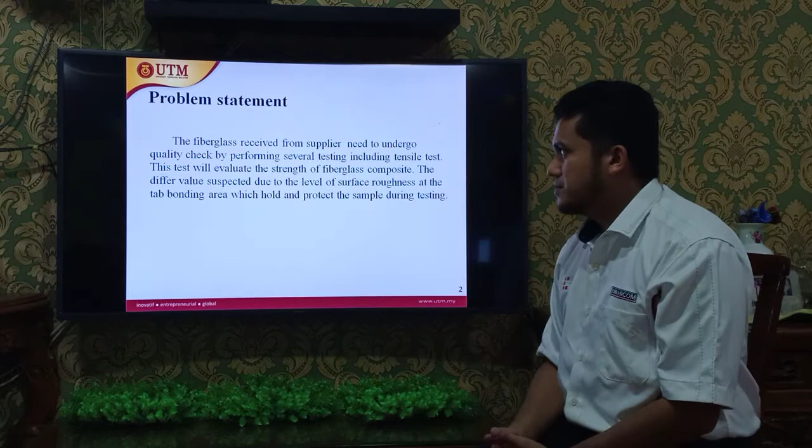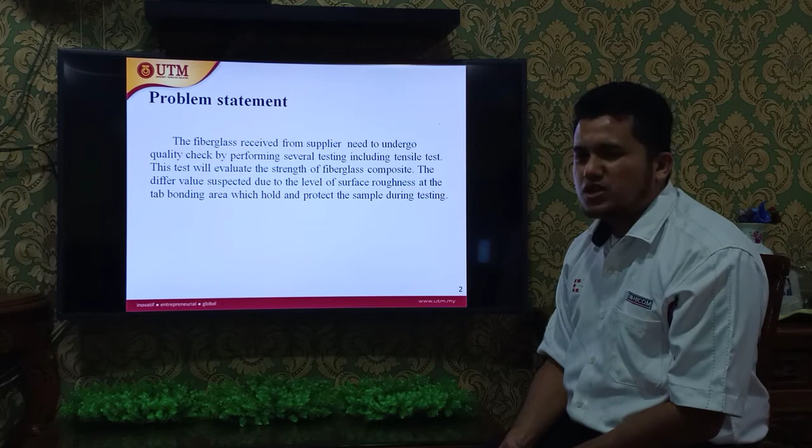The fiberglass received from the supplier needs to undergo quality check by performing several tests, including a tensile test. This test will evaluate the strength of the fiberglass composite. The differing values are suspected to be due to the level of surface roughness at the tab bonding area, which holds and protects the sample during testing.

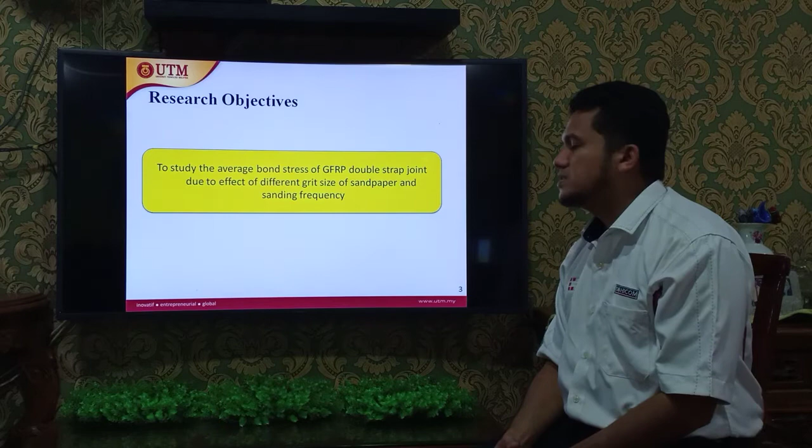This is my research objective: to study the average bond stress of GFRP double strap joint due to the effect of different sizes of sandpaper and sanding frequency. For scope of research, this project is to investigate the main contribution to the bonding strength of the tensile tab area, like surface roughness and adhesive material used.

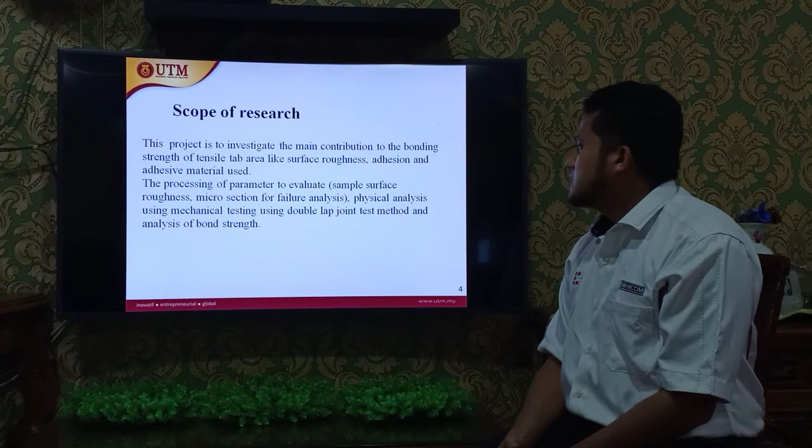The parameters to evaluate include sample surface roughness, microsection for failure analysis, physical analysis using mechanical testing with the double lap joint test method, and analysis of bond strength.

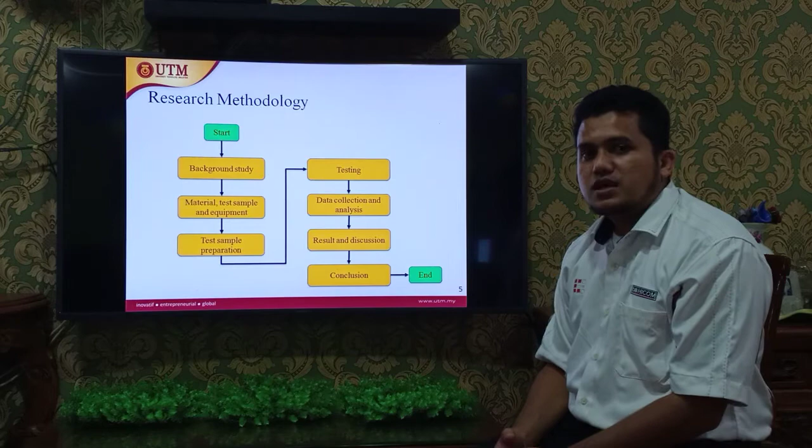This is the research methodology. I will start with the background study. Next, material test, sample and equipment, followed by the test sample preparation. Testing process. From the testing, we get the data. We do data collection and analysis to obtain the results, discussion and conclusions. And lastly, I will conclude at the last slide of my presentation.

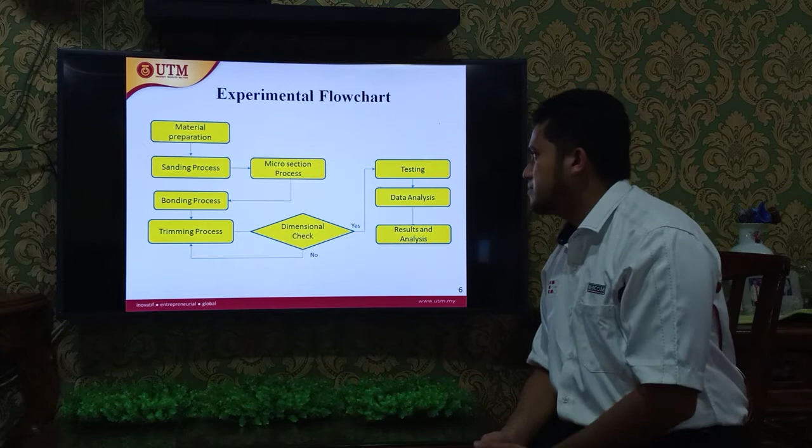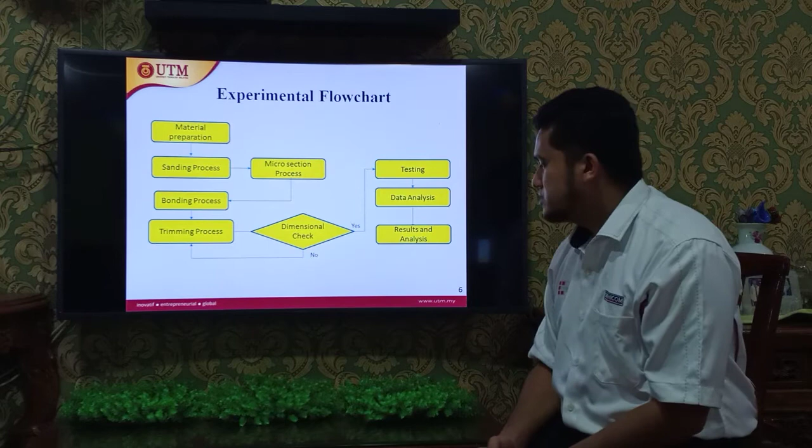This is the experimental flowchart. First, material preparation. Second, sanding process activity, microsection process, bonding process, trimming process. For the dimensional check, if yes, the dimension follows the requirement, we proceed to testing. If no, we revert to the trimming process to get the dimension as required. After the testing, we do the data analysis and conclude the result and analysis.

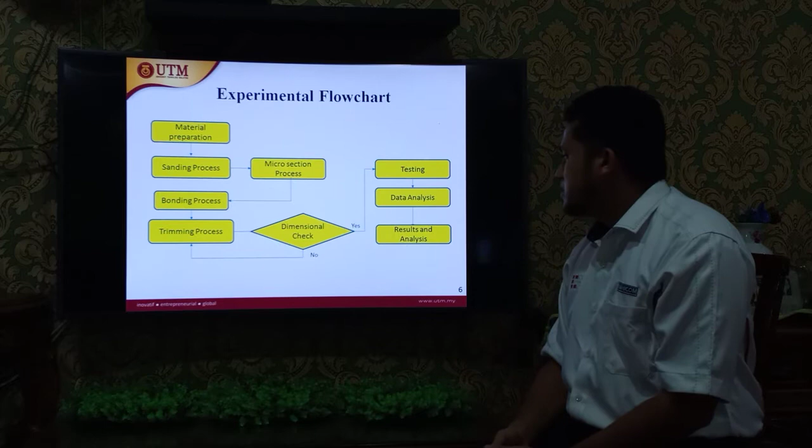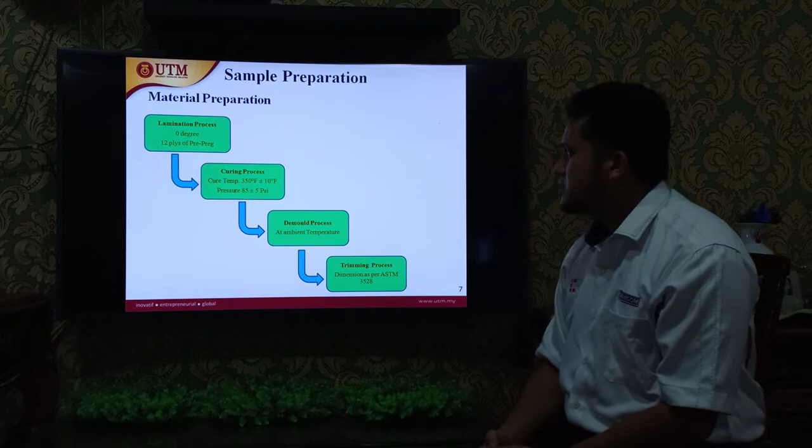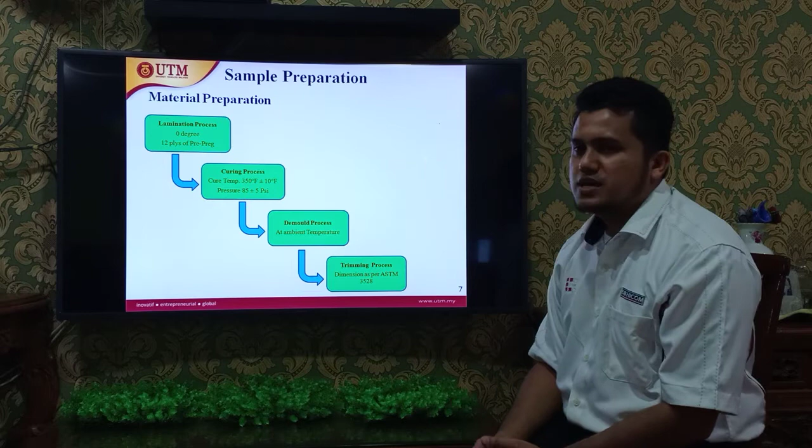This is the materials preparation for the fiberglass lamination process, 0 degree, 12 ply of prepreg. After that, curing process, cure temperature 350 Fahrenheit, plus minus 10 Fahrenheit, pressure 85 plus minus 5 psi. After that, demold process at ambient temperature, which is room temperature, and lastly the trimming process as per dimension at ASTM D3528.

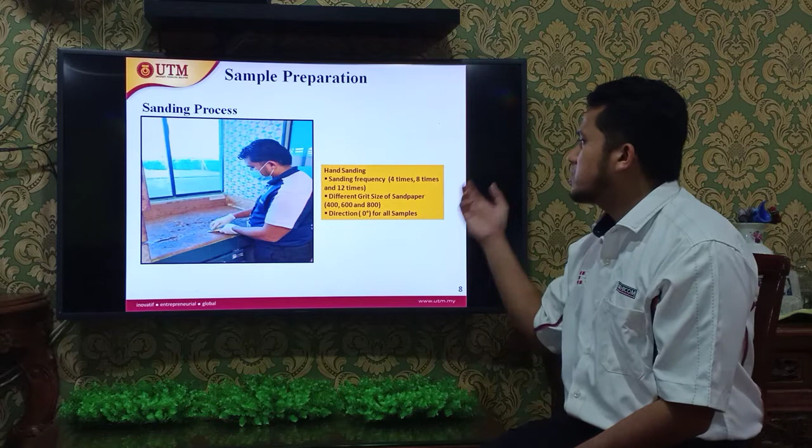This is the sanding process activity. I use the hand sanding method with sanding frequency of 4 times, 8 times and 12 times for different grit sizes of sandpaper, 400, 600 and 800. For all samples, I do the 0 degree direction.

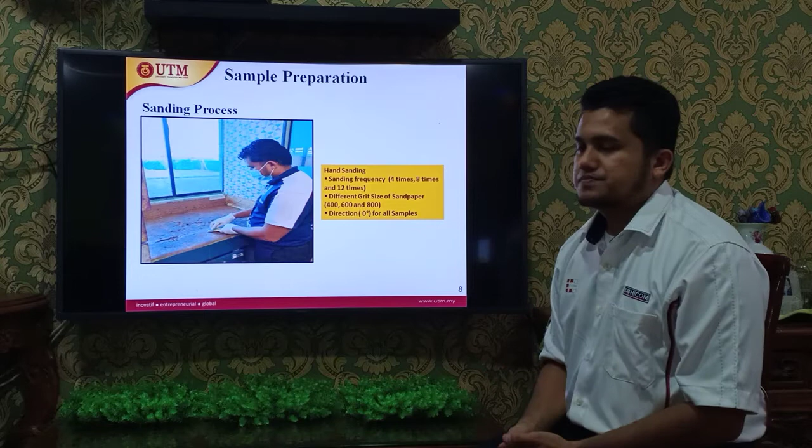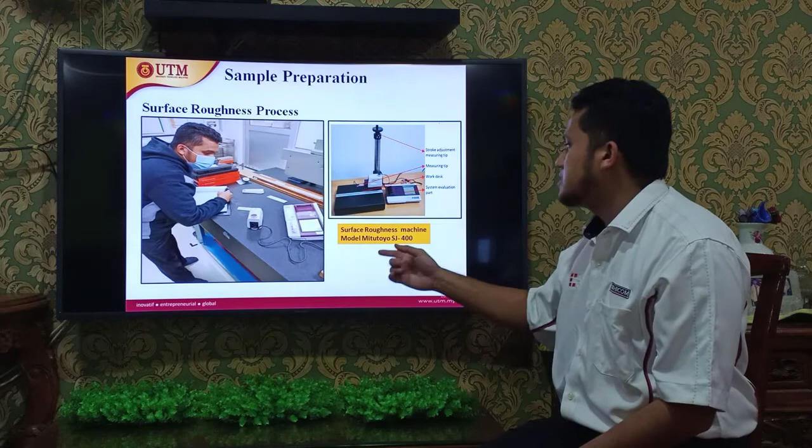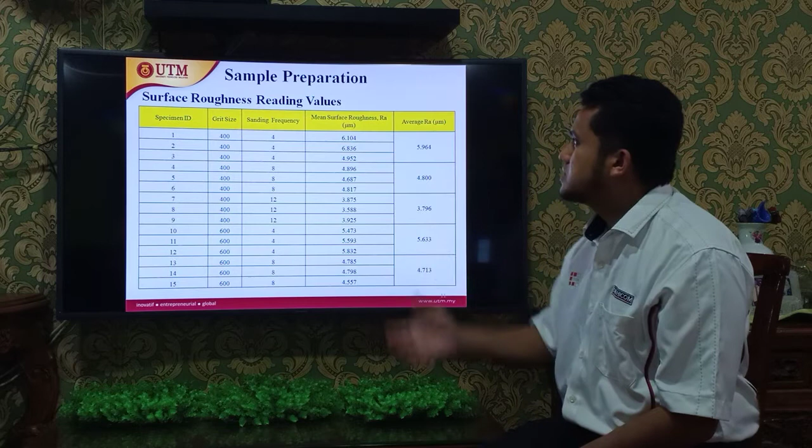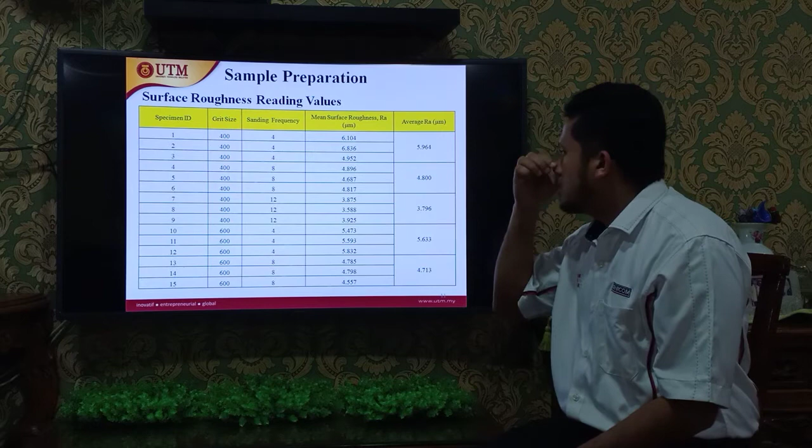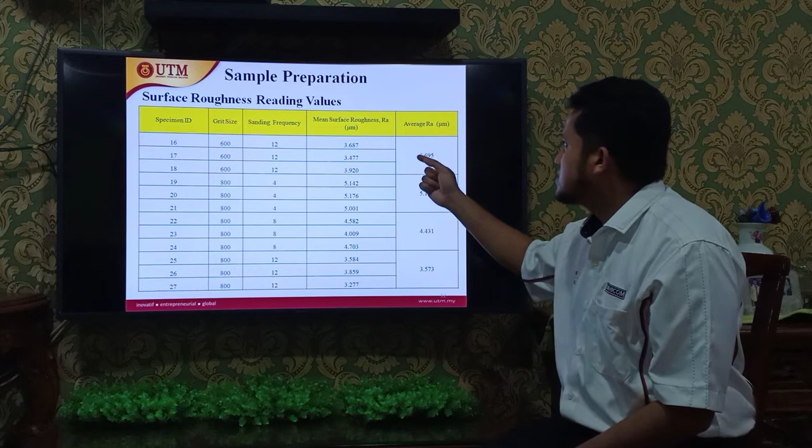This is the surface roughness activity. I use the surface roughness machine model Mitutoyo SJ400. After we do the surface roughness activity, we get the reading values. For grit size 400 with 4 times sanding frequency, we get the highest average surface roughness, 5.964, and the lowest surface roughness reading is for 800 with 12 times sanding frequency, 3.573.

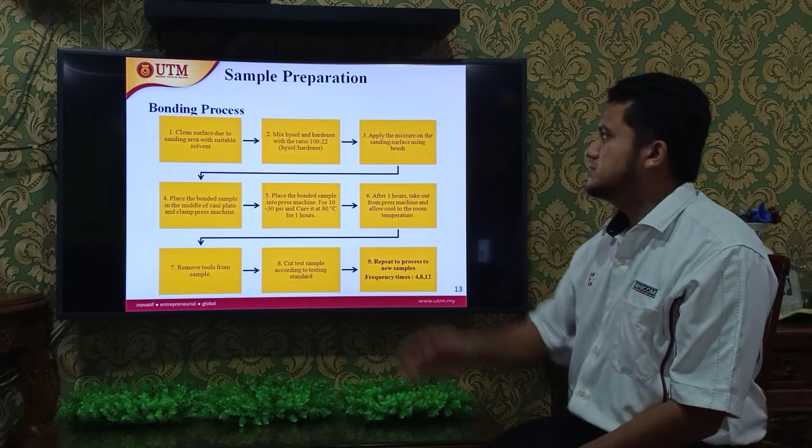This is the flow of the bonding process activity. First, clean the sanded surface with a suitable solvent. Second, mix Hysol and hardener with the ratio 100:22. Third, apply the mixture on the sanded surface using a brush. Fourth, place the bonded sample in the middle of the caul plate and clamp press machine.

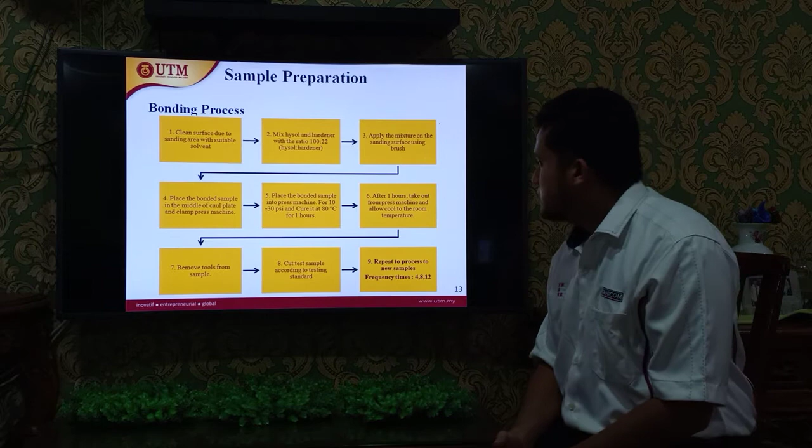Fifth, place the bonded sample into the press machine at 10 to 30 psi and cure it at 80 degrees Celsius for 1 hour. Sixth, after 1 hour, take it out from the machine and allow it to cool to room temperature. Seventh, remove tools from the samples. Eighth, cut the sample according to the testing standard. Ninth, repeat the process for new samples with sanding frequency 8 and 12 times.

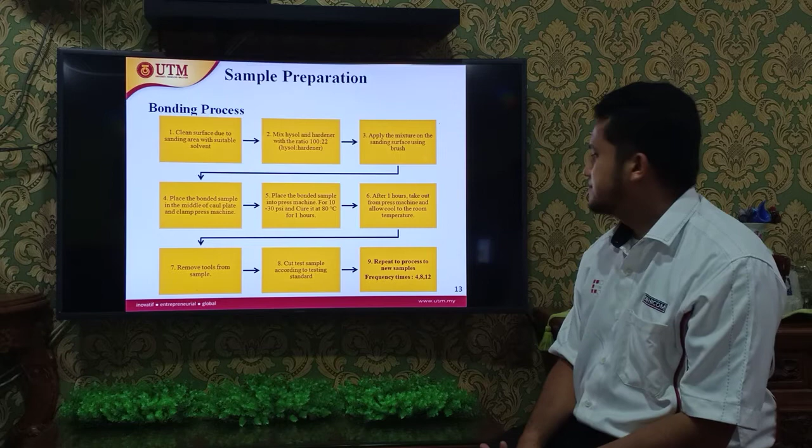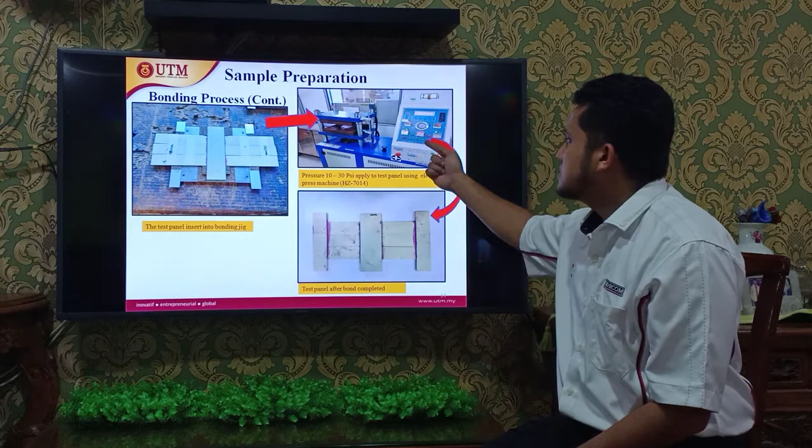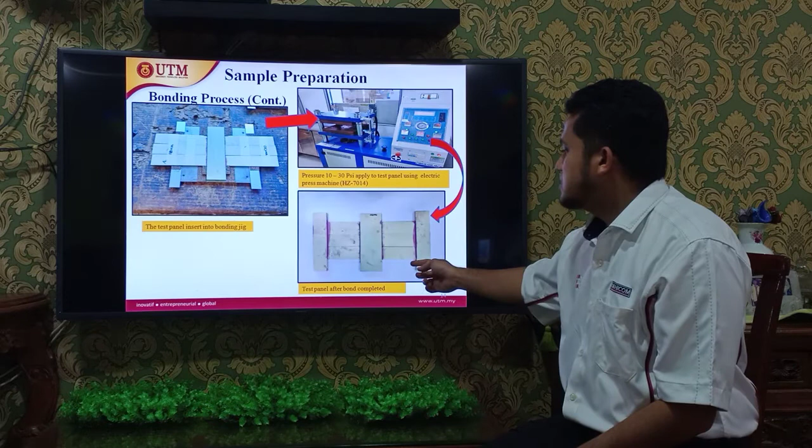As we see, this is the bonding process. The picture shows the test panel inserted into the bonding jig. This is the press machine. Pressure of 10 to 30 psi is applied to the test panel using the electric press machine. And these pictures show the test panel after bonding is completed.

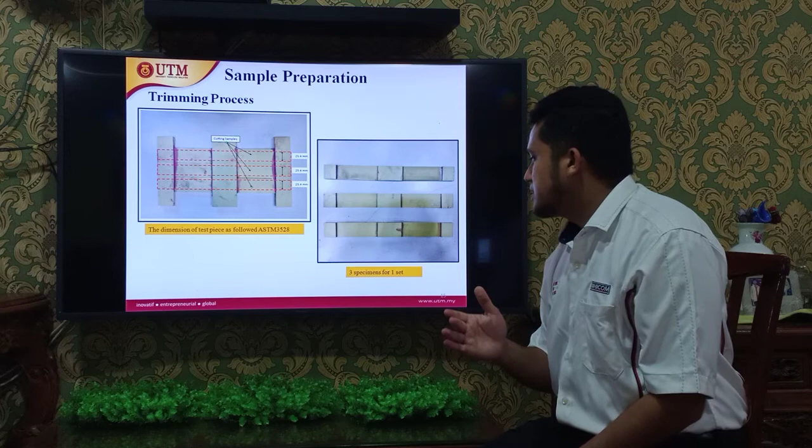Okay, this is the trimming process activity. This picture shows the dimension we want to test as per ASTM D3528, where the width of the sample is 25.4 millimeter. For each test panel, we must do 3 specimens for 1 set.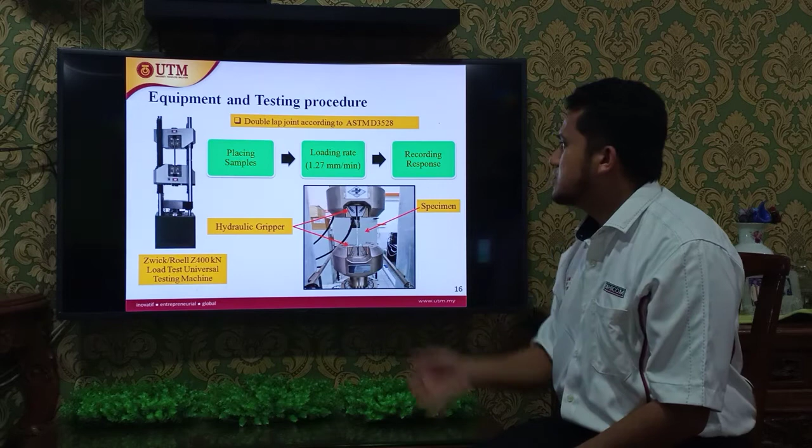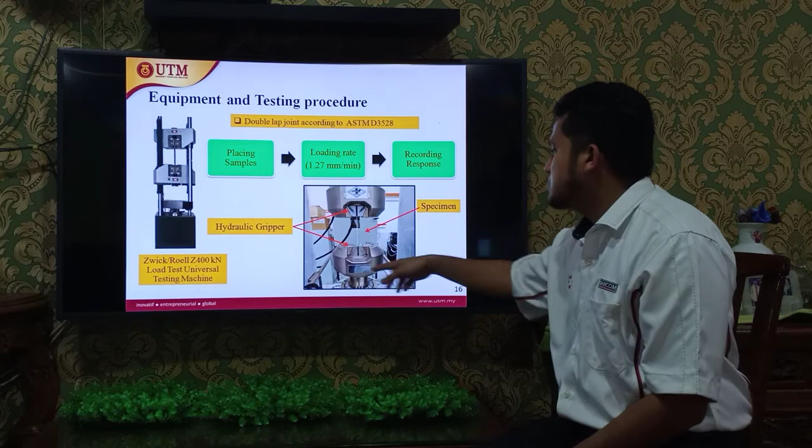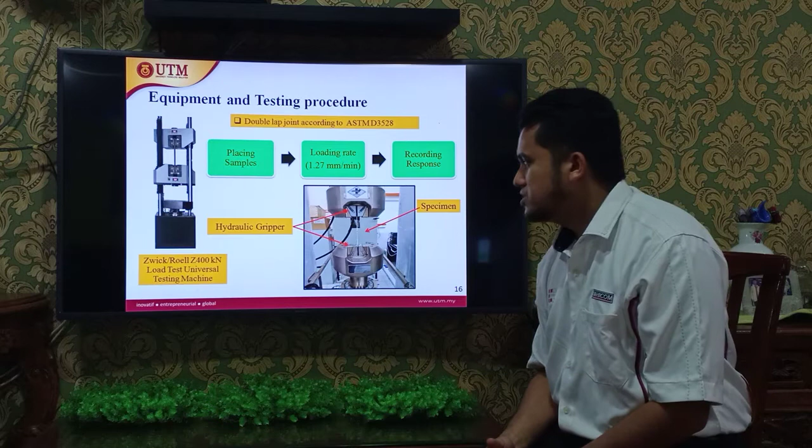This is the equipment and testing procedure. We do the double lap joint according to ASTM D3528. First, placing samples. Second, we use the loading rate of 1.27 mm per minute. And lastly, the recording, where we get the result. This is the test specimen picture, with the upper and lower hydraulic grippers. We do the load test on the universal test machine Zwick Z400 kN.

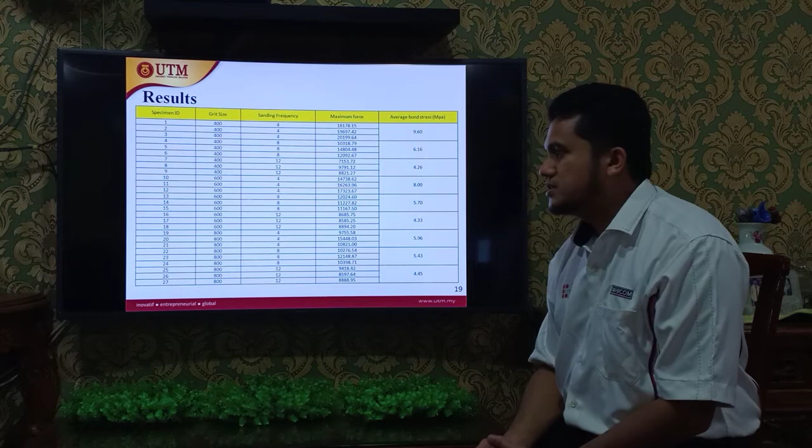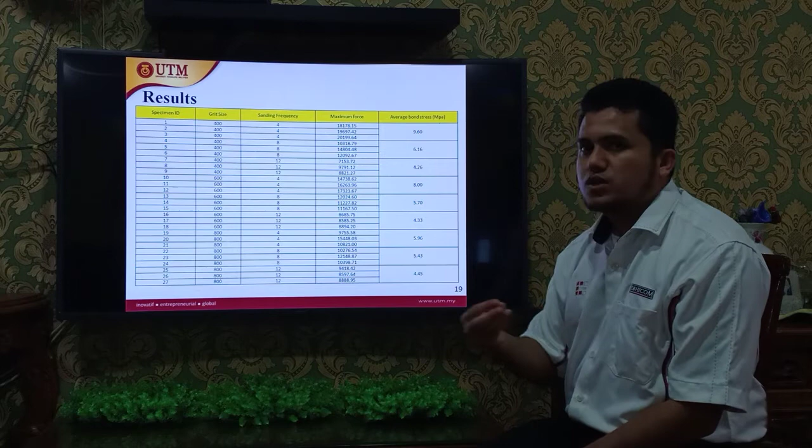In my opinion, if we increase the sanding frequency to 12 times, the average bond stress is roughly equal at 4.34 megapascal.

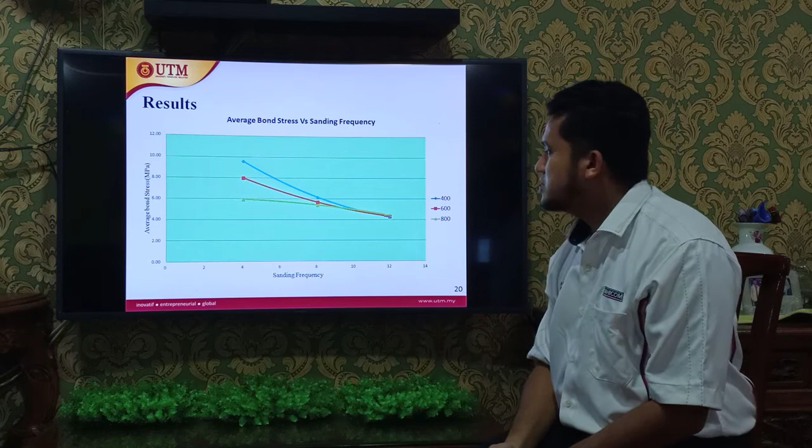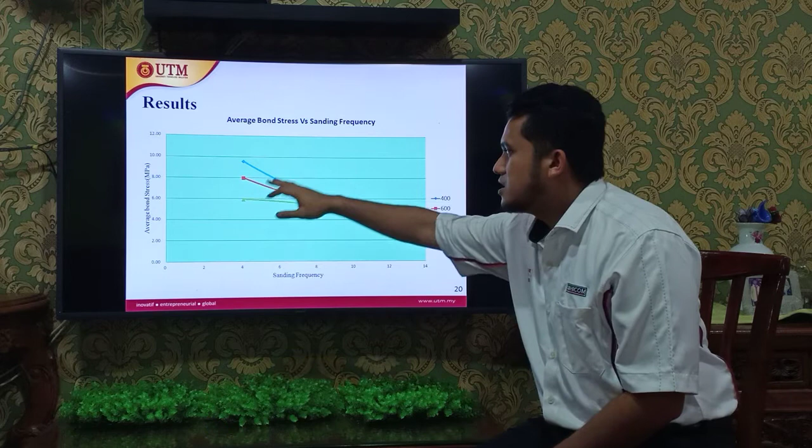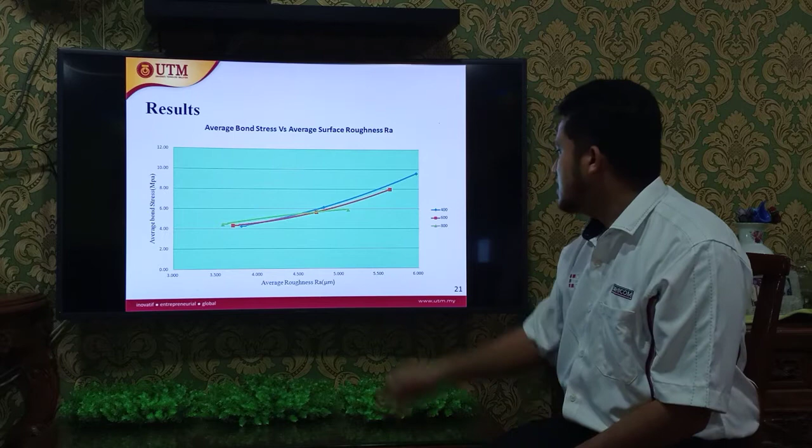Okay, this is a graph of average bond stress versus sanding frequency. As we see, grit size 400 with sanding frequency of 4 times is the highest for average bond stress. This graph is average bond stress versus average surface roughness. Grit 400 is the highest for average bond stress, and its surface roughness is highest.

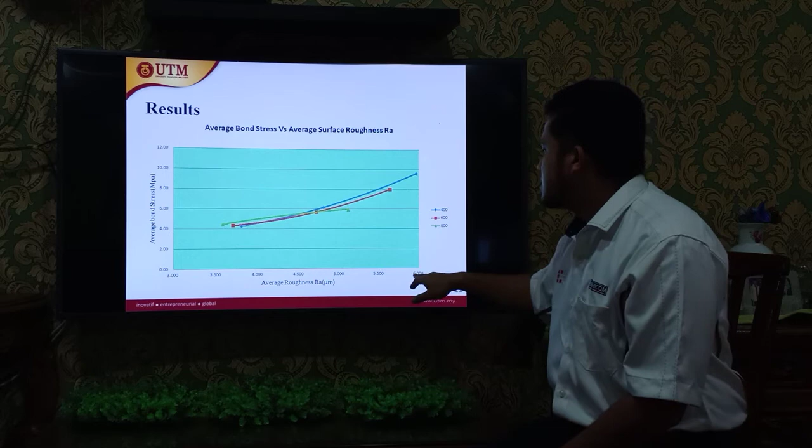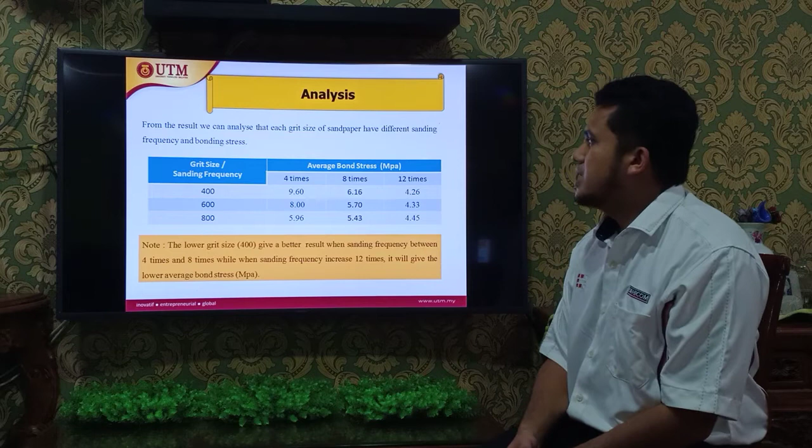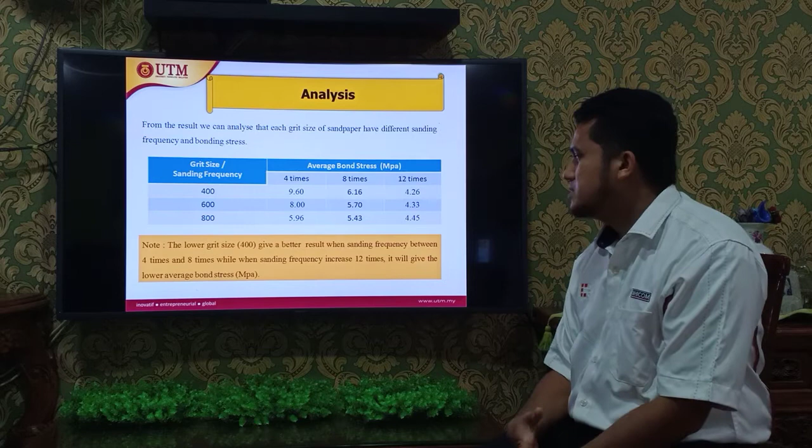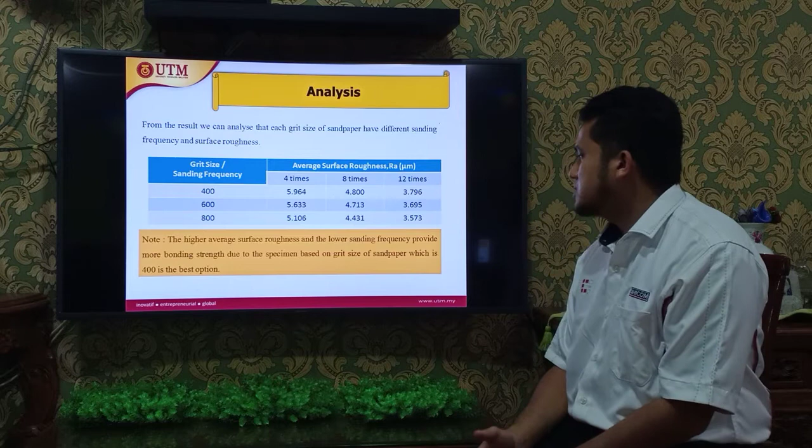From the result, we can analyze that each grit size of sandpaper with different sanding frequency gives a different bond stress. The lower grit size 400 gives a better result when sanding frequency is between 4 times and 8 times, while when sanding increases to 12 times, it gives a lower average bond stress. For surface roughness, higher average surface roughness and lower sanding frequency provide more bonding strength, and based on the grit size of sandpaper, 400 is the best option.

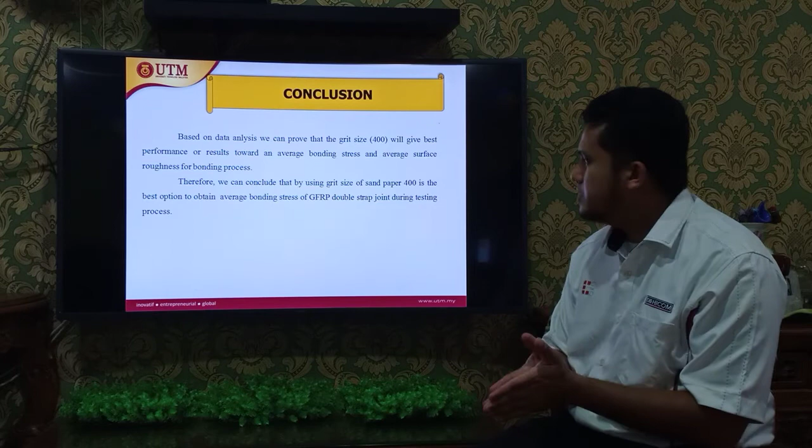For the conclusion, based on the data analysis, we can prove that grit size 400 gives the best performance in average bonding stress and average surface roughness for the bonding process. Therefore, we can conclude that using sandpaper grit size 400 is the best option to obtain the average bonding stress of GFRP double strap joint during the testing process.